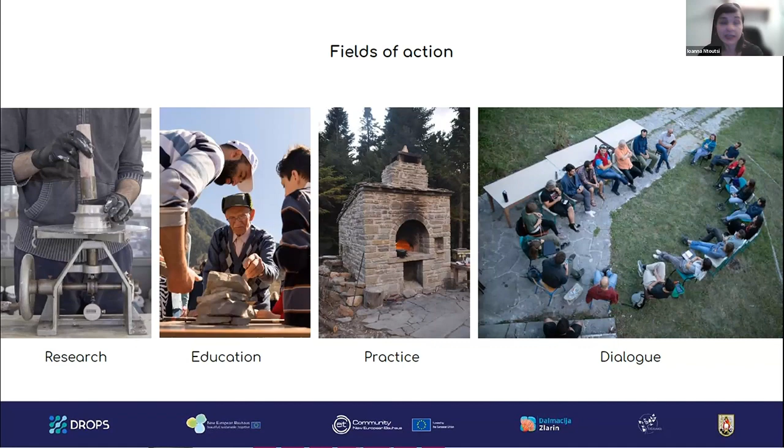There are mainly 4 pillars on which we base our work: research, education, practice, and public dialogue, dissemination. In terms of research, we're of course discussing architectural research, how the historical structures on their own can teach us significant lessons. So we have to study them, we have to document them. We are not discussing only the restoration of historical practices, we are discussing how traditional building techniques can be integrated into modern architectural practice.

We are conducting a lot of laboratory analysis on historical building materials and a lot of scientific research for reclaiming this knowledge, because we have to decode, let's say, the historical knowledge that is not well documented, and because we also have to test and evaluate the new materials that we're using in restoration projects and new constructions. So we are developing synergies and collaborations with national and international research institutions and laboratories.

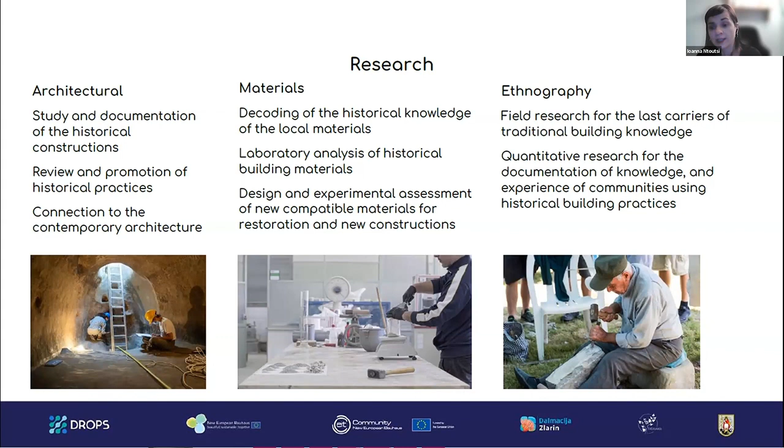And we also integrate an ethnographic approach in our research, meaning that we conduct field research to connect with the last carriers of this knowledge, the elders that can transmit to us this knowledge and these memories of working with stone and with lime and with local materials before the arrival of Portland cement. But it is also important to document the knowledge that exists inside the communities as a whole. Apart from the people that were technically involved, we have witnessed that historically the whole community knew about these practices, knew a lot about how to sustainably use the local materials.

Regarding the pillar of education, we have different educational formats. Mostly two of them: the apprenticeships, meaning intensive technical training programs that are addressed mostly to professional craftspeople. They combine practical training in actual restoration projects or other construction works that are guided by our craftspeople collaborators. Also, there are hands-on workshops that we organize. These might be from 3 to 12 days, complete programs that include hands-on training, but also lectures, guided tours, seminars and different things around traditional building techniques, around the cultural and natural heritage of each region where we work.

In terms of practice, we try to conduct different kinds of works, from construction and conservation works on historical buildings. We have been mostly involved with pathways, cobblestones, kalderimi, as they are called in Greek, but also in many Balkan languages. But also we have conducted several works that have to do with traditional infrastructure and how it can be a solution that can tackle environmental challenges. And these are the two case studies that we're going to discuss later on. And as I said, we also conduct new architectural projects that are based on traditional building techniques.

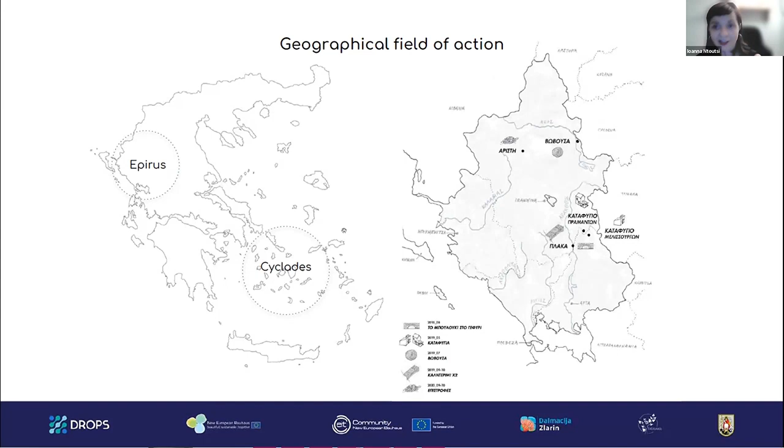And I'm going to continue now by presenting the first case study regarding the traditional water management infrastructure that we have worked on. This is the project Under the Landscape. It was conducted in the region of Santorini, or else known as Thera, and Thirassia. Actually, it's an archipelago, meaning an assemblage of group islands.

And this project was a hands-on investigation on the local material knowledge systems and the local building practices, but also the cultural values that underlie the specific architecture of the area, the unique architecture of the area, and the landscape of this place. And it was also a trial to foster the need for safeguarding this architectural legacy and these local practices in view of the commodification of the area and the vast touristic masses that every year subsume the islands.

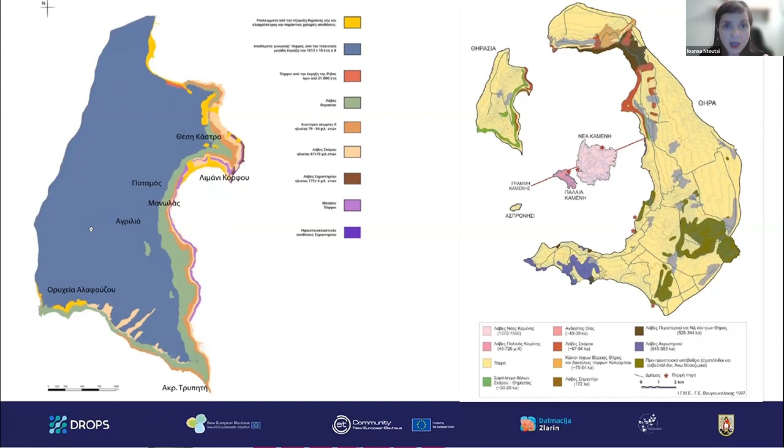This yellowish color that covers most of Thira and almost the whole surface of Thirassia is the main deposit that was created by the Theran eruption, that we're going to discuss more as the presentation follows. And again, this is a more detailed geological map of Thirassia, and this blue layer is Theran tephra, this layer deposited with the Theran eruption. This is how Theran tephra looks.

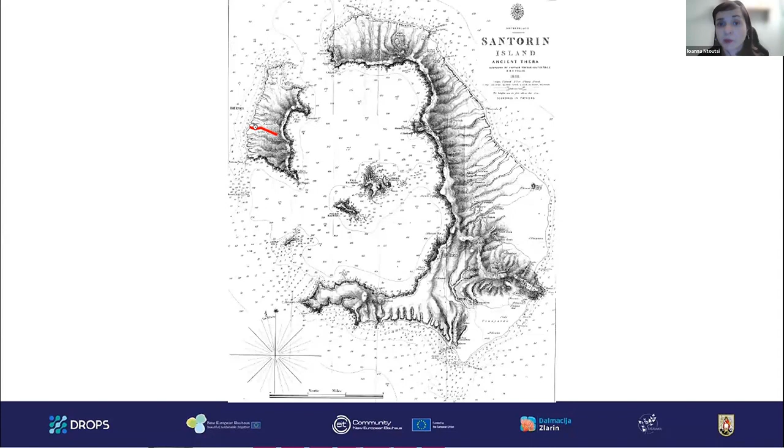And it is quite important because it is what we historically know in the history of architecture as a pozzolan, a natural pozzolan, meaning a volcanic product, an aluminum silicate product, which when it is combined with lime putty gives very good mortars, very good building materials. And there is actually one cave settlement that we were involved with during this project, which is in this area of the island of Thirassia, Agrilia, and this is most probably the first depiction of Agrilia in a map from the mid-19th century.

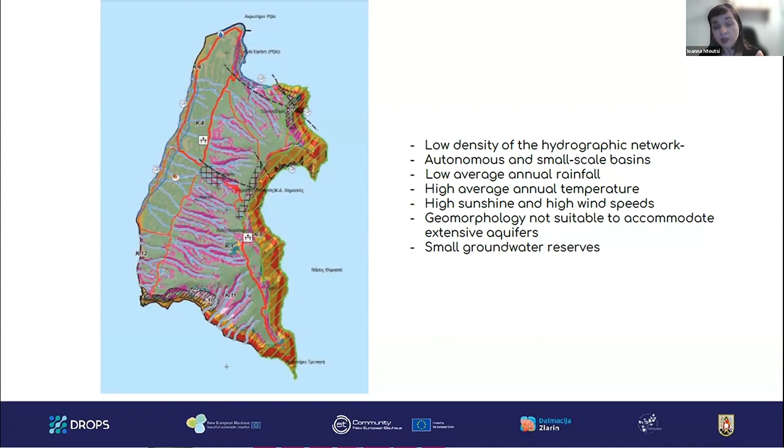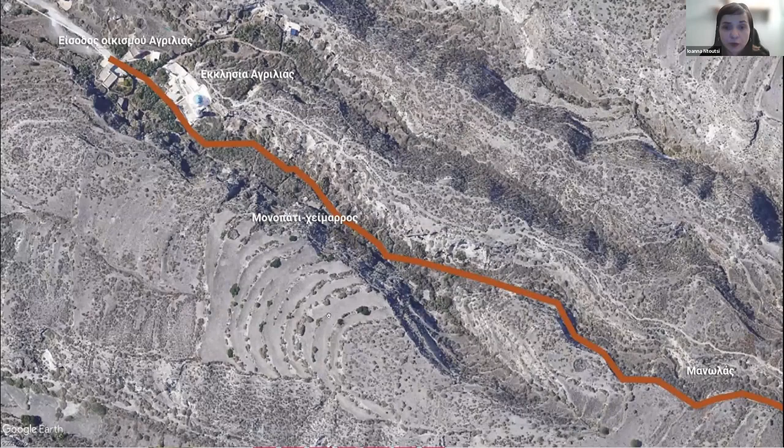This is the pathway that we were involved with during our restoration project. In the satellite image you can see here is the settlement of Agrilia, and the pathway continues all the way up to the central settlement. And you can also see that the settlement is actually built inside a ravine. And you can also see the terraced landscape, which is a very characteristic view of the morphology of the whole surface of the island.

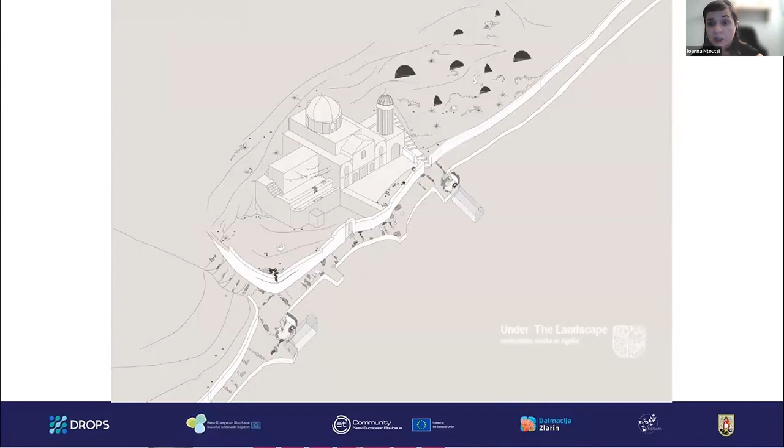The settlement is quite abandoned after the 70s, because most of the people moved from Thirassia to come to Attica to work here. And actually, I will leave this presentation for a minute to just present you this. Sorry, it didn't work before. I hope you can see. Okay, this is actually the main pathway of Agrilia.

We see the same PDF that you were showing us before. Okay. So can you see what you can see, sorry. Can you see the GIF that I'm showing now?

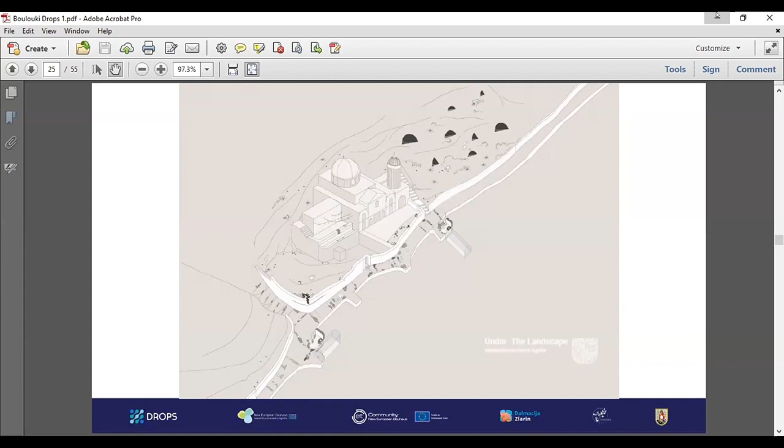Yes, now we see also the PDF, the same. You want to show us something else? The animation? Yes, I'm showing an animation. It isn't, I don't know why. You can exit, maybe you can exit share screen and then share screen again. Okay, I will do that. Sorry for the inconvenience. Okay. Share screen. Now, are you seeing this animation?

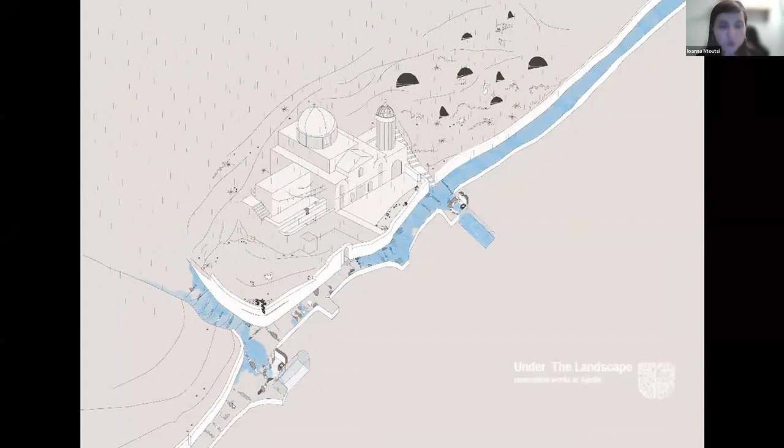Yes, yes, we see. So here you can see how the pathway works, functions when it rains. Okay. What I didn't say before is that the main pathway of Agrilia and the Agrilia settlement itself is built inside the ravine and above one of the underground streams that we saw before. When it rains, the pathway diverts the rainwater inside this kind of infrastructure systems that are embedded in its route, and they store and collect the water.

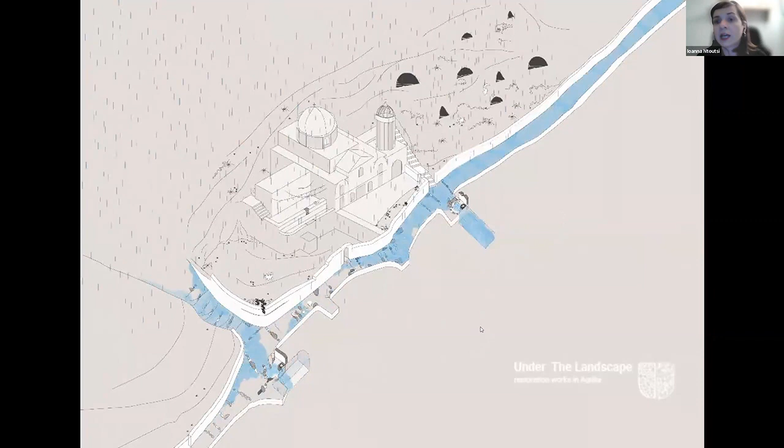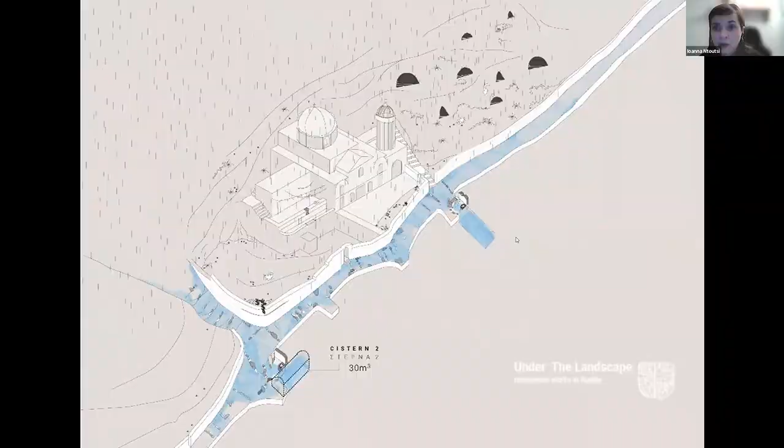And this was one of the core axes on which our restoration work was based for this project.

And I'm sorry again, I will stop sharing and share again. Can you see my screen now? I'm in my PowerPoint, my PDF. Yes, yes, yes.

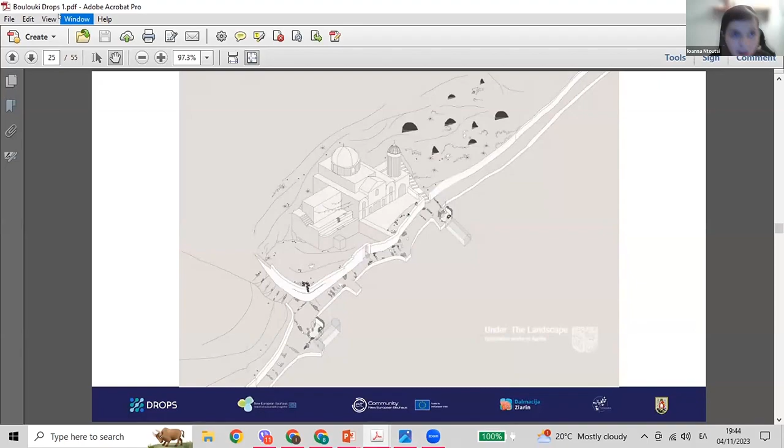Okay, so this is something to keep in mind for explaining more on the restoration project. And also this is a depiction of how these cave dwellings look, how these houses and storages and different infrastructures are carved sideways and downwards into the mineral tephra deposit. One part of the project was studying this architectural paradigm, which is quite unique, not only for Greece, but on the Mediterranean scale at least.

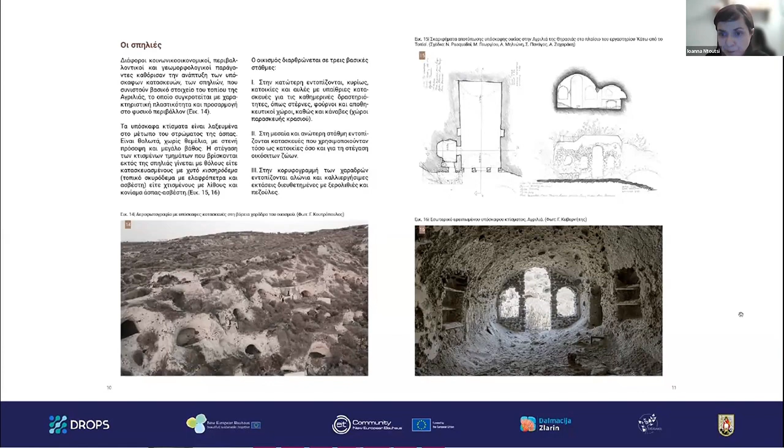There are few such examples left, especially in the area, because of the whole touristic growth of Santorini. They are mostly turned into touristic accommodation places, and they have not kept their characteristics. In Thirassia, you could see how these dwellings look. And actually, tephra was a very important mineral, also mined, extracted and exported to many areas worldwide to be used mostly in hydraulic projects, for example in the Suez Canal or other hydraulic projects around Europe and the Mediterranean.

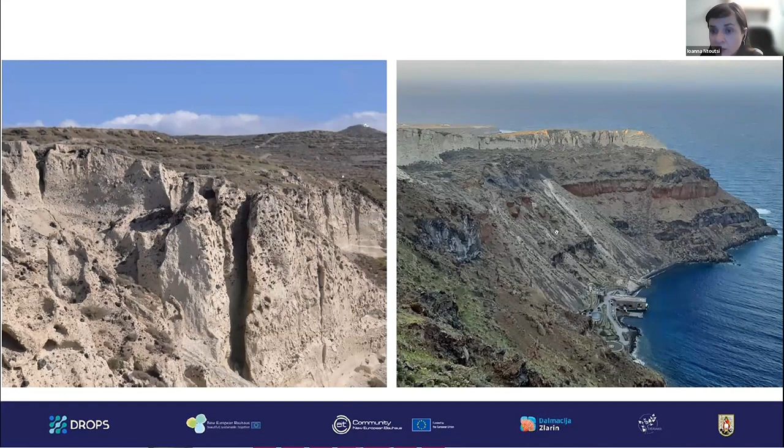And these are the historical quarries. And there is a large archive in Greece that we found from the Technical Chamber of Greece about how you could use this material along with lime to produce very long-lasting mortars and concrete, and different samples were collected from historical structures of the area in order to document this knowledge about hydraulic mortars, as we call them. These materials not only harden underwater, but they are also water resistant. So we can see here an aspect of materiality depicting these wise ways of saving water.

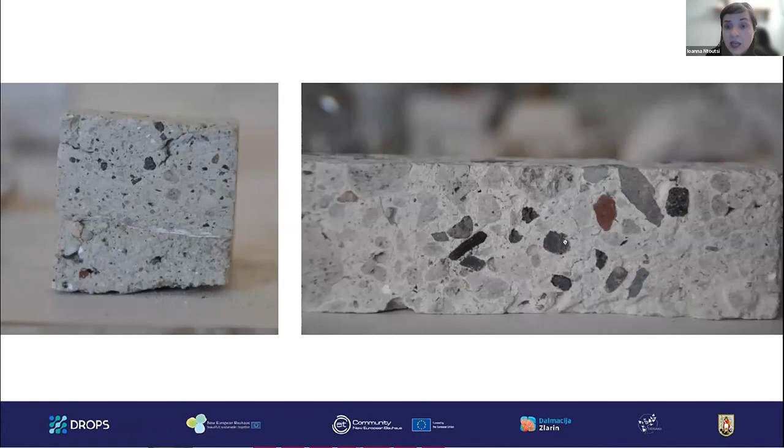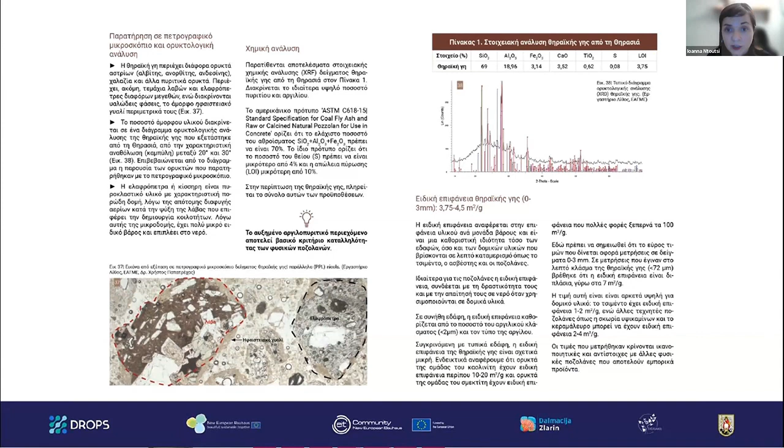And these are several samples that we collected, mortars or local concrete that were used in vaulted structures, and we tested their material properties in the laboratory. We analyzed tephra to see what characteristics should be defined as suitable for its use in mortars, in order to reuse the local material. And these are all aspects of one handbook that we published on the use of traditional building techniques of Thirassia and Thira.

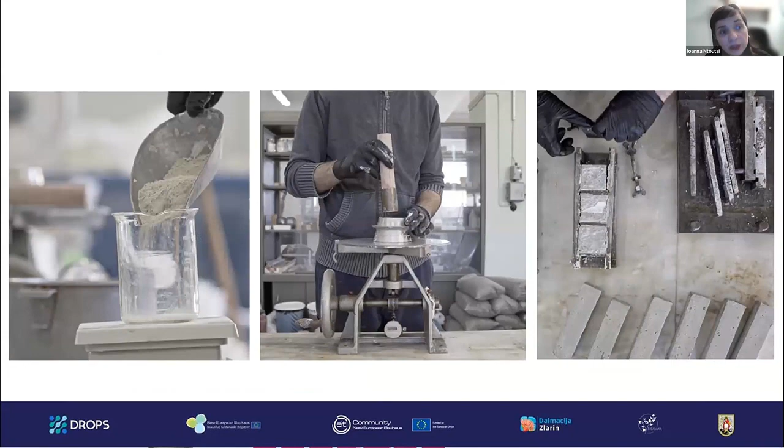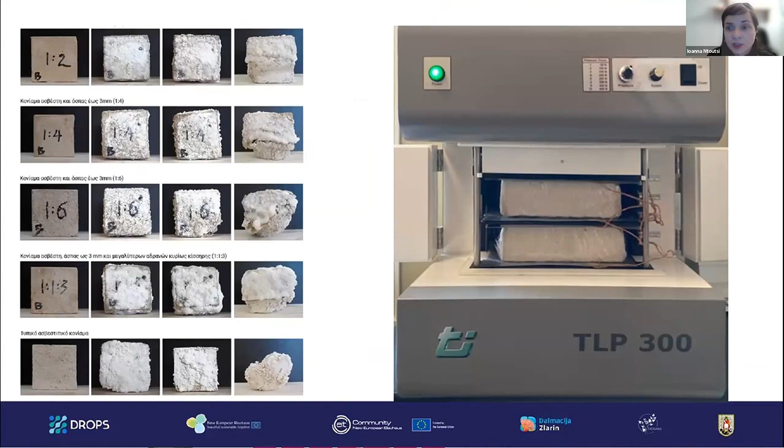And this is the material in different granulometries as we analyzed it, and we used it to test new specimens, how we could develop new building materials based on the historical recipes that we also documented through interviews with the local craft people. Again, several scientific results, all published in Greek. We also tested them in terms of modern performance, how they could withstand the aggressive salt spraying in the islands, how they behave in terms of thermal conductivity and insulation, and all the aspects we have to consider in order to reuse these materials in modern practice.

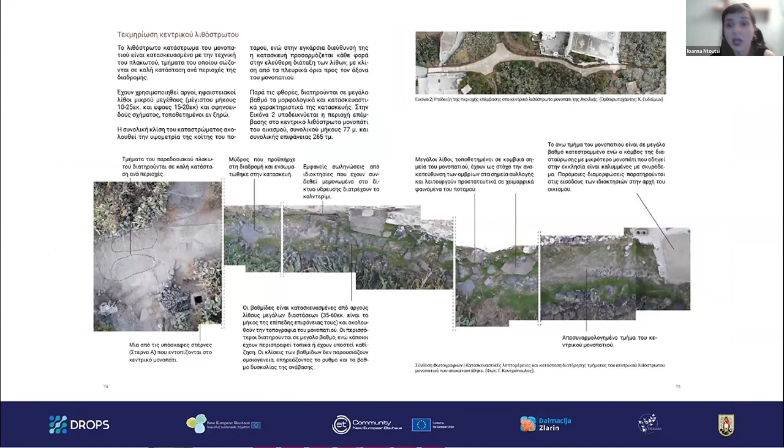And apart from documenting and analyzing the material knowledge of mortars, we were involved with documenting and analyzing the specific characteristics of the dry stone cobblestone pathway that we restored. This is one of the cisterns that we also restored on the route of the pathway. And there are several architectural details related to water management, meaning the use of very large stones that divert water towards the surface of collection before entering the water cistern, and the inclinations in different parts of the pathway. And this is the whole part that was restored by our team, almost 80 meters in length.

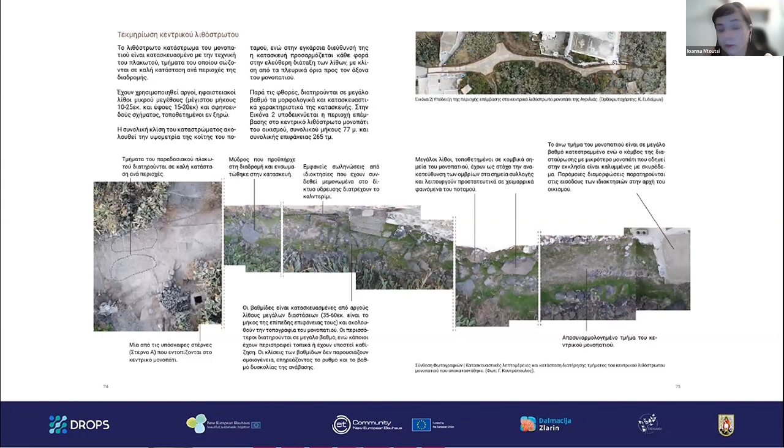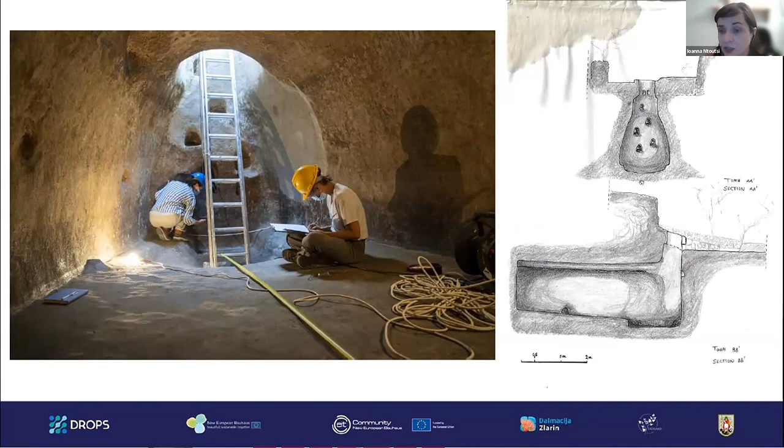And this is the interior of a cistern after it has been cleaned, and after all the debris and vegetation was removed, and how we document the shape and the architectural details that you see here in the sections. Again, some documentation on the cisterns and how they look, and how the stones, how the external surfaces collect and divert the water inside.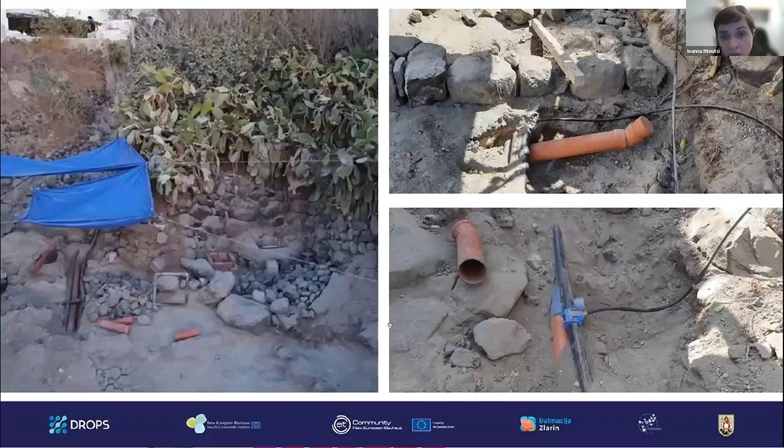And one of the issues that we had to face was that there was a new system of sewage and water pipeline that had to be installed prior to the restoration of the cobblestone, and we did that along with the local authorities. And this is a view of the cobblestone, how it used to be, and the cistern here. It was for us an opportunity to really study the local technique of plakoto, as it's called, a more specific dry stone technique.

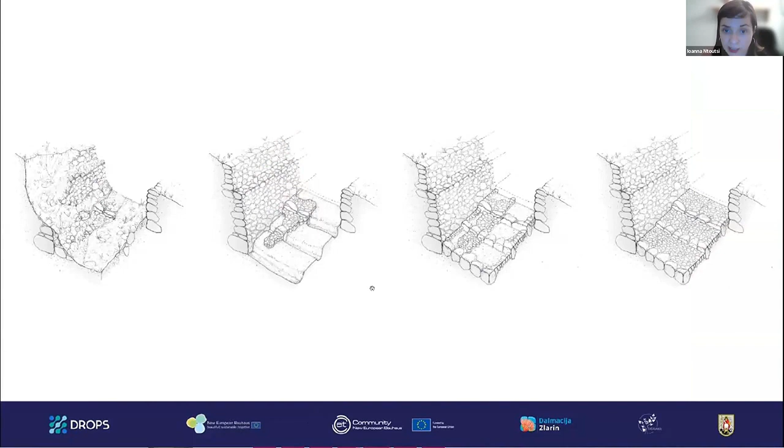Apart from the pathway, we also restored the neighboring wall, a retaining wall, double leveled wall. This wall that was fallen. This is the result after the restoration. And this is how we approach the restoration of the cisterns. What was important was to reapply the traditional mortars technique, this technique based on the use of Thera earth and lime, as I said before, which had multiple layers.

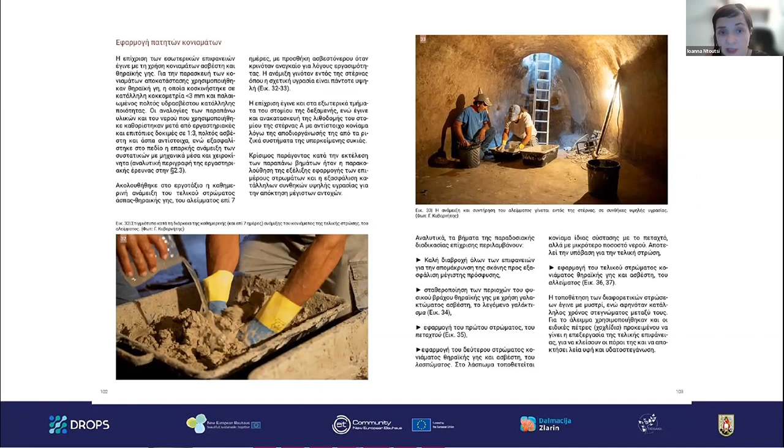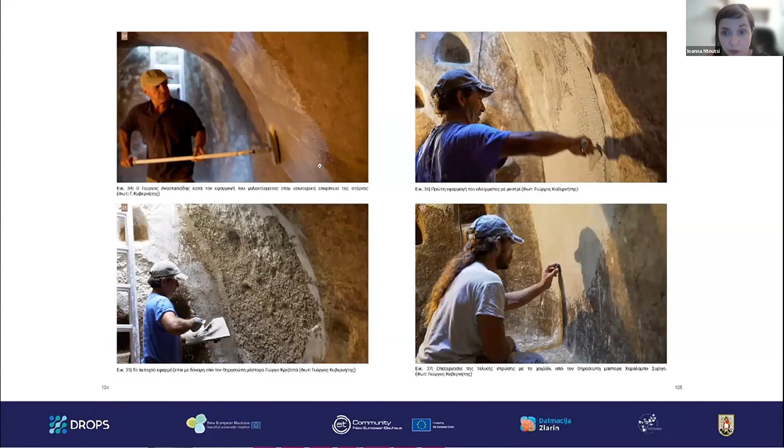And here you can see the masons that we work with, local people from the area, who weren't themselves aware of the technique, but we had tested them in the laboratory and we experimented with them, and we applied them to restore the cistern. And here is the situation before, for example, external surface and internal. And here are the several layers of this technique that were applied in order to waterproof the cistern, in order to maximize its ability to collect and store the water.

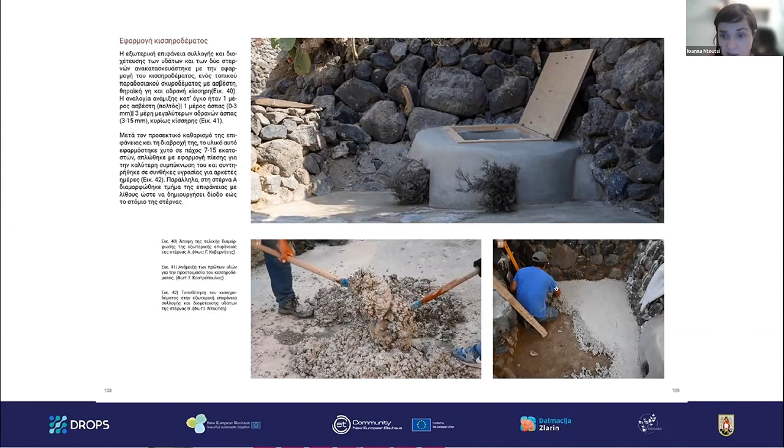And the external surface was restored using a local concrete technique, again with Thera earth and lime, but also with larger pumice aggregates. Okay, and here is how it is applied. And this is how the cistern is restored, the ultimate result. And the ultimate result from its interior.

And to sum up, this work was done collectively, and it was done through a professional apprenticeship where 3 tutors and 4 apprentices participated. Most of them were people from the area, either Pirasia or Santorini, but also through a 2 weeks hands-on workshop where 20 participants from Greece and abroad participated. And we had some open days for the local community where residents of Pirasia and Santorini were able to join the works and to see how a cistern looks and how it used to work and works, how it is restored. The same for the pathway. And that's it from me.

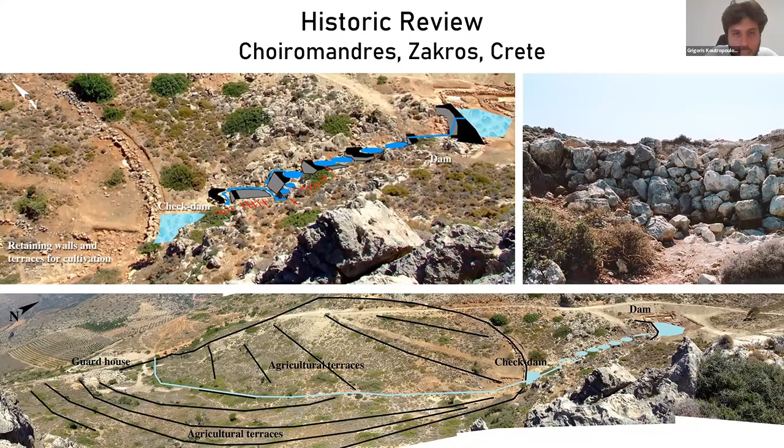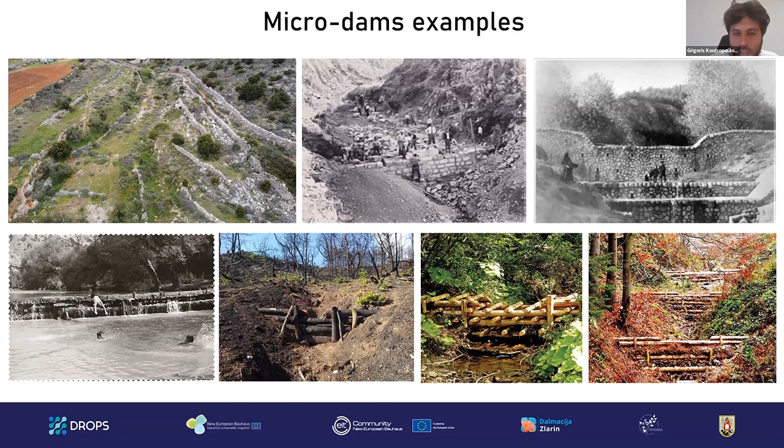Now we're moving, sorry for that, to another island in Greece, Apeiranthos in Naxos, in the Cyclades, where between 1992 and 1994, Manolis Glezos, a Greek politician and the president of Apeiranthos, had this initiative to construct this big number of microdams in the Apeiranthos watershed to enrich the aquifer of this area and also raise awareness about water scarcity in Naxos Island and the Cyclades, in these kinds of fragile ecosystems all around South Greece. And this was the first pilot program, 30 years ago in Greece.

And after that, let's find out the values for the society and the environment of these traditional practices. First of all, as for the environment, these constructions are built with local materials. The stone is found in this place, and it's a natural and reusable material. Also, the footprint of this construction is very low. It's used to enhance the biodiversity, because they keep water in these reservoirs during the hot, dry summer months. Also, they enrich the aquifer, inhibit soil erosion, and prevent floods and these kinds of natural disasters.

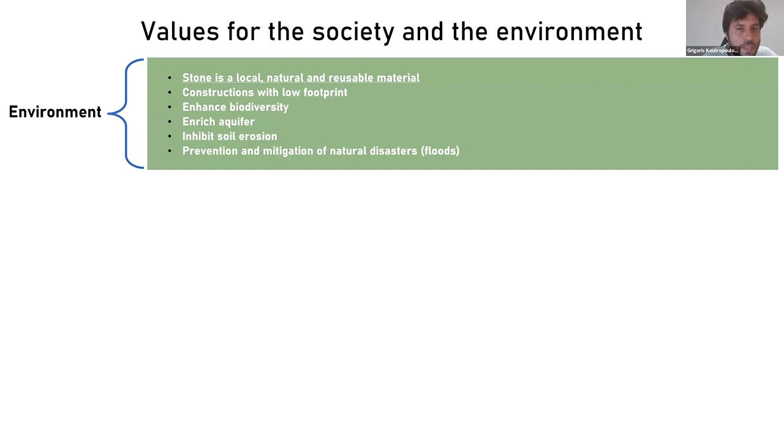Also, they create new local working positions that cannot be mechanized. They're traditional crafts, and in this way they strengthen the social cohesion, and there's also a recognition of this specialization as a cultural and living heritage of the area and the people. Also, these practices and constructions preserve the traditional landscape and the identity of the society that is reflected on the landscape. They shape the unique landscape as a barrier to landscape standardization, and they help the water and land management of the community.

And last but not least, as for the economy, the dry stone technique is an environmentally friendly economy. It's a green infrastructure, and it's ecological building. There's this kind of ecosystem cooperation between all the craftspeople, the researchers, educational institutions, the local community, and also the authorities. And also we have the principles of the circular economy, and just to mention the revitalization of this productive structure, the terraces and these hydraulic infrastructures.

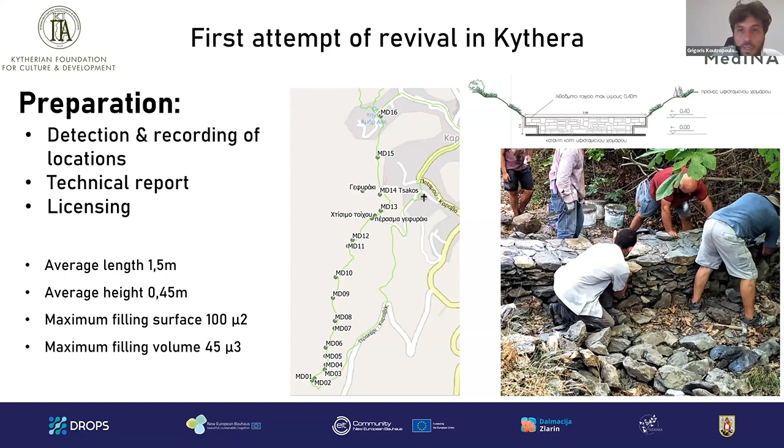Now let's move to Paros, where last June we implemented the next project about microdams in Kavouropotamos, which means the Crab River. It's a periodic flow stream, and its watershed is 5.9 square kilometers, in southeast Paros.

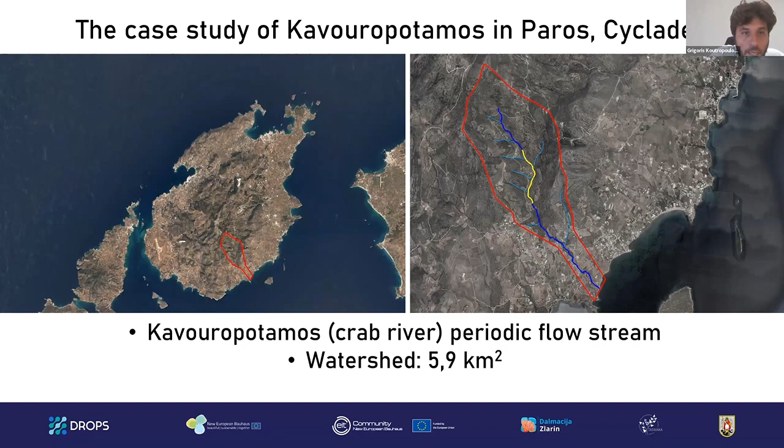And also here the first step was the position of these microdams. It's very crucial to find the best place to construct the microdams. Also, the team that did this field research found some traditional dams there, so we have to restore them and renovate them. But also they made the technical survey for 33 new microdam constructions in length of 1.33 kilometers alongside this Kavouropotamos stream.

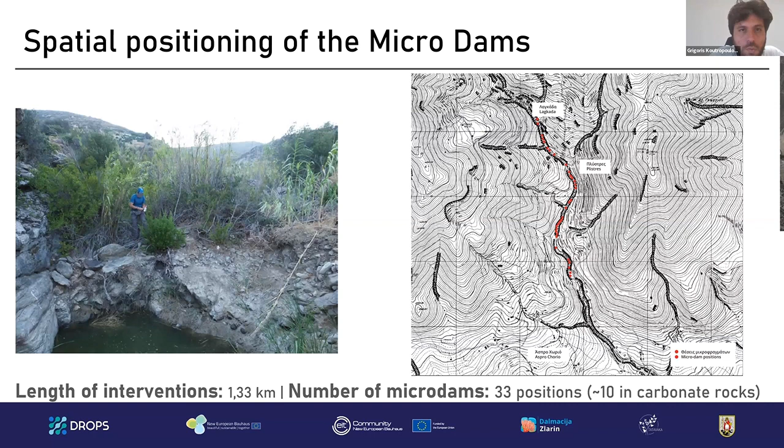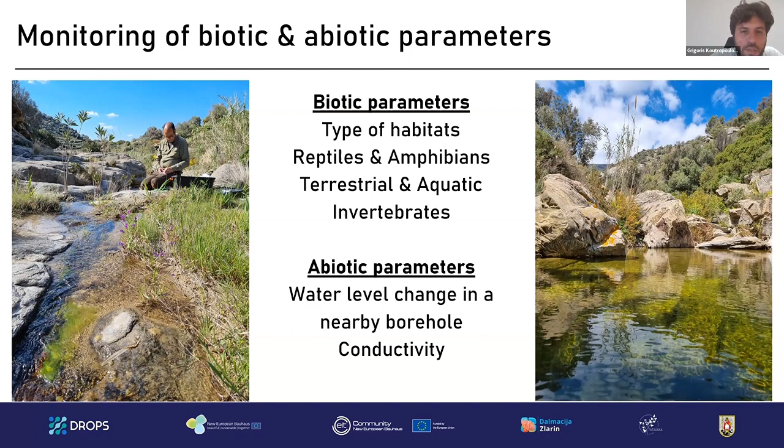And in this project, for the first time, we introduced the monitoring of biotic and abiotic parameters of this intervention in the stream. So we have to document the type of the habitats, the reptiles and amphibians, the terrestrial and aquatic invertebrates, and also for the abiotic parameters that we have to check before and after the construction of the microdams, it was the water level change in a nearby borehole and the conductivity of the water in this area. So the colleagues from the Institute of Speleological Research did this monitoring before and after the intervention.

They had 5 locations that were selected as sampling stations, and a qualitative sampling of terrestrial invertebrates was carried out at each station, and 3 propylene glycol interference traps were placed per station with an average retention time of 1.5 months. There were 3 sampling changes before construction of the microdams and 3 after the construction. And 2 sound recorders were placed a total of 4 times on a similar date to the other samplings.

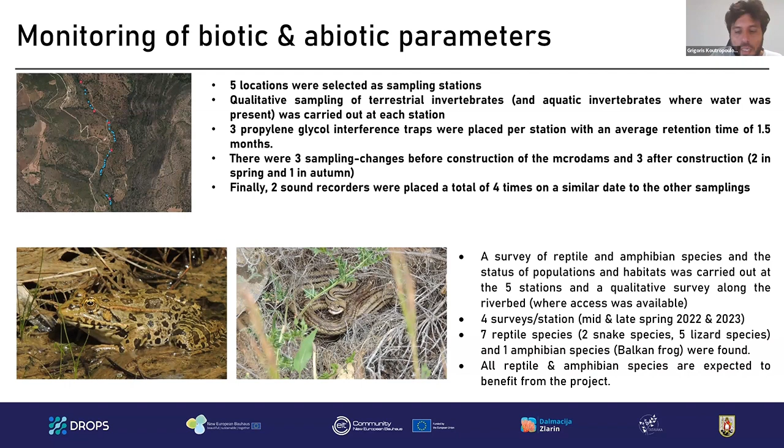Also a survey of reptile and amphibian species and the status of population and habitats was carried out at these 5 stations. And 7 reptile species and 1 amphibian species were found. And we hope that all reptile and amphibian species are expected to benefit from the project. And to be honest, the statistics and the results after the interventions are not so encouraging because it needs a lot of time to better the condition for biodiversity and also for the aquifer. So we're going on with monitoring for the next year, hoping for changing numbers of biotic parameters.

And as for the building aspects, the technique that we used, it's like a small arch that is constructed on the ground, as you can see in the drone photo and also in this small sketch. It's dry stone construction with all the material from the place. But the crucial thing is to find 2 stable rocks on the 2 sides of the stream and place the foundation and the upper construction of this, let's say, small bridge that is planted on the ground.

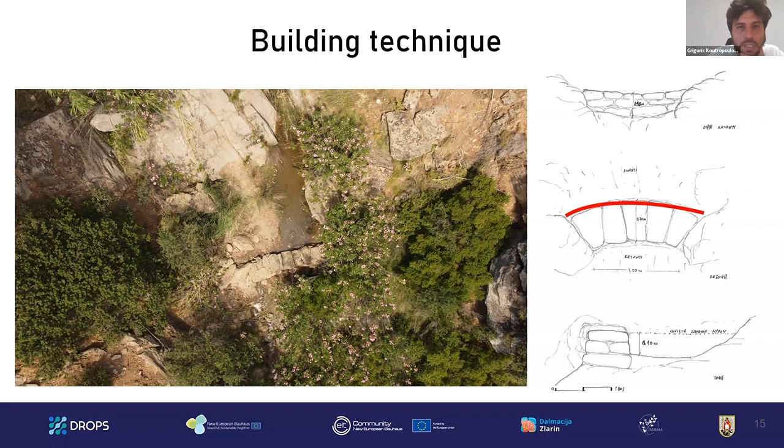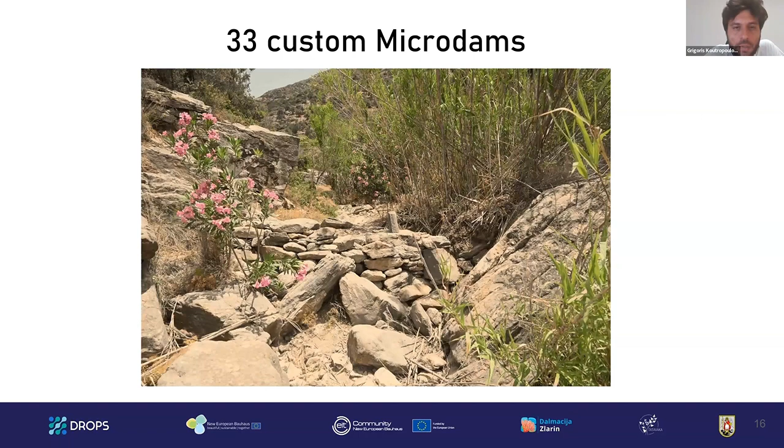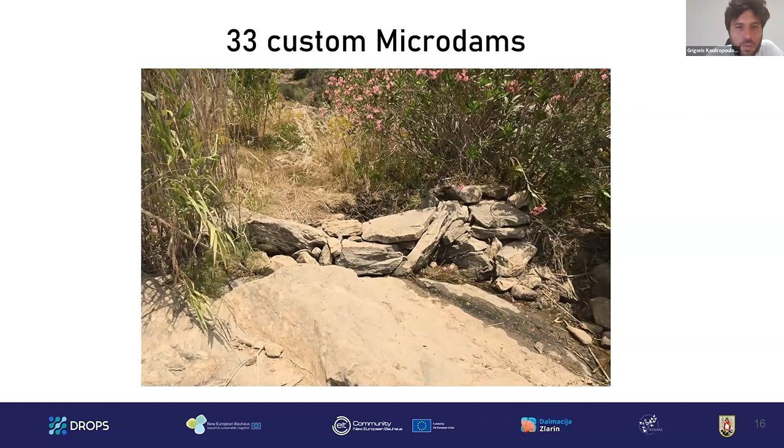And also it's an arch construction because in this kind of construction the water in flood is going and the pressure goes on the 2 rocks on the 2 sides, and in this way we have very stable and durable construction. Here you can see this custom construction of the 33 microdams that are all different from each other because they're adapted to the exact place that they are constructed, with the local material that in any case is different from the other place. Just to show the diversity of this kind of construction alongside this Kavouropotamos stream.

And in the last year project in Paros, I have to mention the participatory approach, the education and raising awareness during this process. We trained local craftsmen tutors during this construction process. Two of our craftsmen were born and raised in the Kavouropotamos place, and we found them and we engaged them in the educational construction process. And also we had the involvement of volunteers, like 15 participants. Maya was one of them, and it was open for the local community to come and visit us and participate in the construction process.

And also a short documentary was created by a child from the secondary school of Paros. And finally, we organized an open event with public dialogue on water resource management issues in the town of Paros. So all were invited, all the local community and also the stakeholders of the region, discussing the problems of water scarcity and also revitalizing these practices for water management from the past.

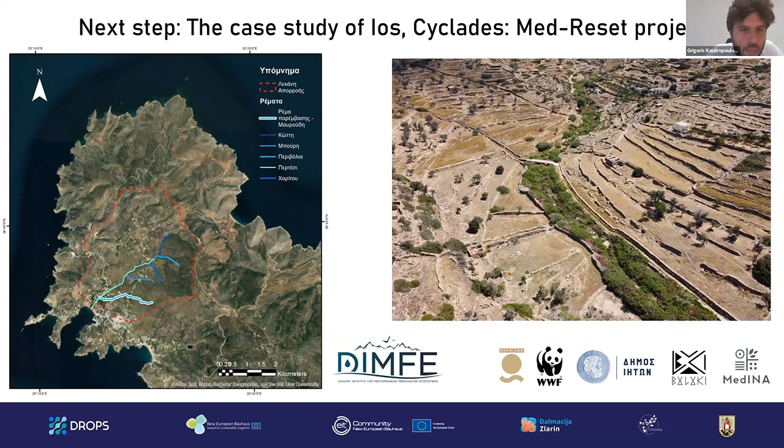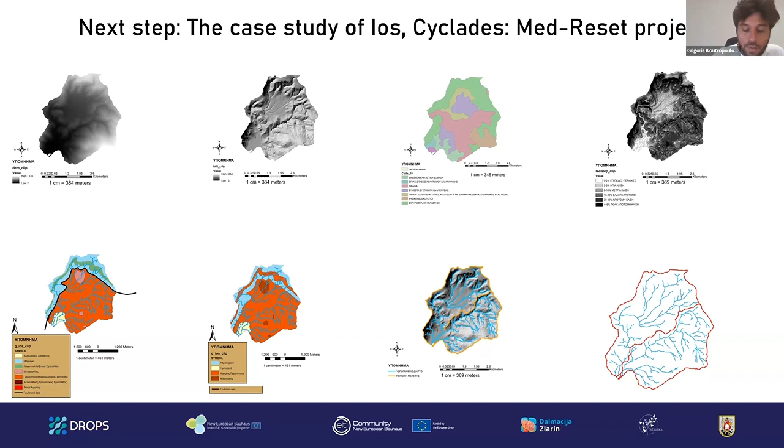And in this project, we have a collaboration with the Agricultural University of Athens that did great research in depicting the hydrological parameters that affect the position of the microdams and their impact on the aquifer. And here you can see the site of the Pertesi watershed.

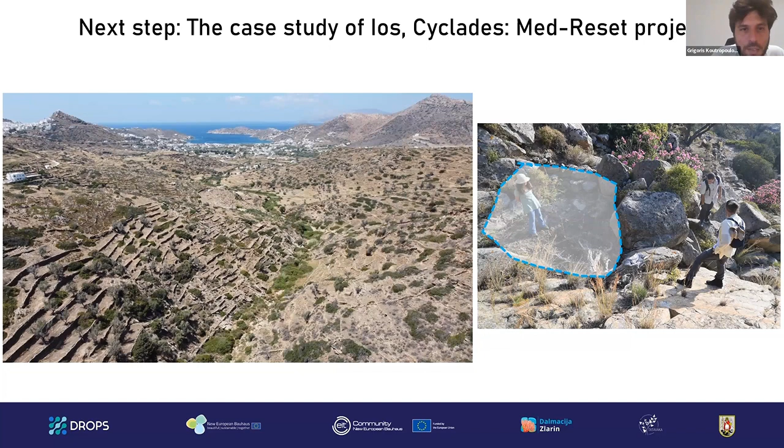the big amount of water that is lost in the sea, and with these kinds of practices and techniques, we can keep it and reinforce and enrich the aquifer of this island and this fragile ecosystem, as a good practice for water management in this kind of difficult dry situation in South Greece.